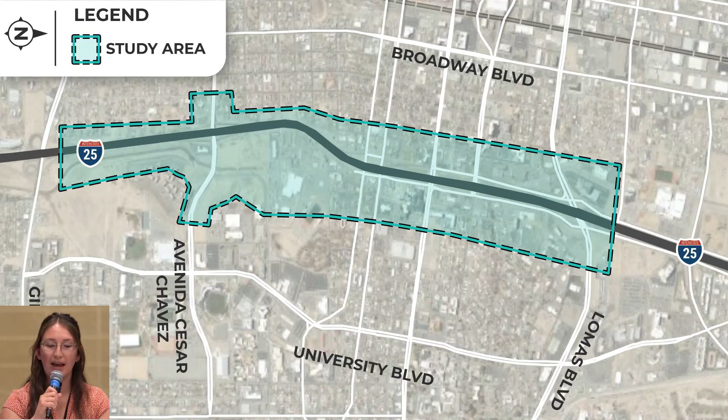So how did we get to this Phase 1B study? For those of you who remember, the DOT has looked at this area before. In 2014, Phase 1A of the I-25 South Corridor study was completed. This previous study defined a purpose and need for the broader corridor. Following that, the DOT completed Phase 1B, which identified a preferred alternative for the overall corridor. Regarding the specific S-curve, the previous preferred alternative was not drastically different than what is there today.

Since this previous study was completed in 2016, the S-curve has experienced reoccurring safety issues. This has prompted NMDOT to initiate the study and take a closer look at this specific section to identify a solution that improves safety and mobility. So that's how we got here. Conducting another Phase 1B study will look at the current conditions and gather new data.

At this time, all options are on the table, including the previously identified preferred alternative. It's great for you to get involved now and stay involved throughout the study. As part of this new Phase 1B study, we have drafted a new purpose and need specific to the S-curve, which we'll be talking through in a few minutes. At the end of Phase 1B, we will identify a preferred alternative. Following that selection, the study will move into Phase 1C, which includes detailed environmental evaluation and environmental documentation of the preferred alternative. Overall, we anticipate the study to last about 2 years between Phase 1B and 1C. We have a couple of boards in the room describing the NMDOT process in more detail if you want to learn more about what happens in these phases.

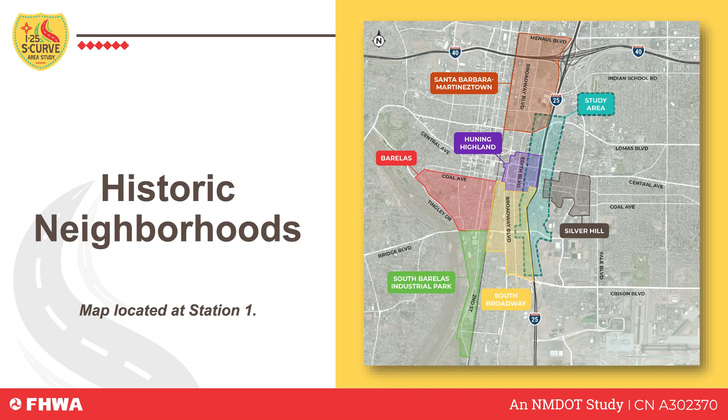We're also looking at environmental resources. So in this area in particular, there are aquatic resources, there are public parks, and there are historic properties. So we've gathered preliminary data to identify potentially historic buildings. And historic buildings are defined as buildings that are on or eligible for inclusion on the National Register of Historic Places, and they're generally at least 50 years old. And to be eligible for inclusion, a property needs to be considered significant in terms of its place or role in the patterns, trends, or events of our history. And like I've mentioned, we have maps depicting these resources at Station 1, so please take a look before you leave today. They'll also be available on our website.

Okay, purpose and need. So one of the early things we do as part of a study is to draft a purpose and need. And a purpose and need simply describes the reason for the improvements or the reasons for a future project. So we have a draft purpose statement on the screen, and it covers 4 categories we've identified as the need. So the NMDOT is proposing to improve safety, address future travel demand, and replace aging infrastructure on I-25 between milepost 223 and 225, and to accommodate active transportation across the I-25 corridor.

So why is this so important? Well, in order to identify a preferred alternative, the team will develop ideas and concepts and alternatives that will evaluate against the purpose and need. So if an alternative doesn't meet the purpose and need, if it doesn't address these transportation issues, then it doesn't move on for further evaluation. So it's important we get your feedback today on these transportation needs, as well as other needs that you may think be relevant. So in your surveys, you'll see questions around this.

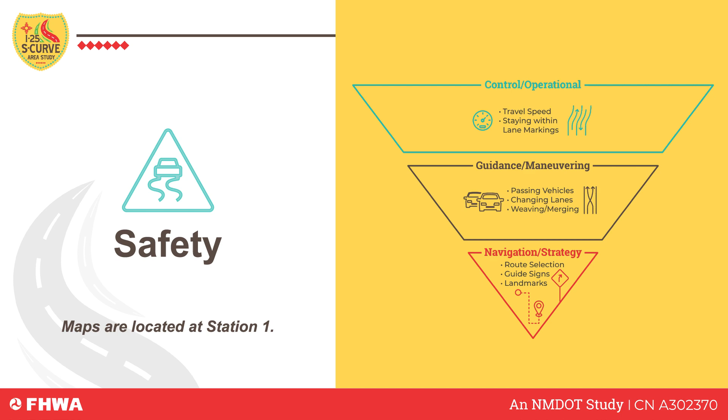At Station 1, we have crash data over the past 5 years that supports this need.

At Station 1, we have maps showing the existing traffic data and the future traffic data in 2050 if no improvements are made.

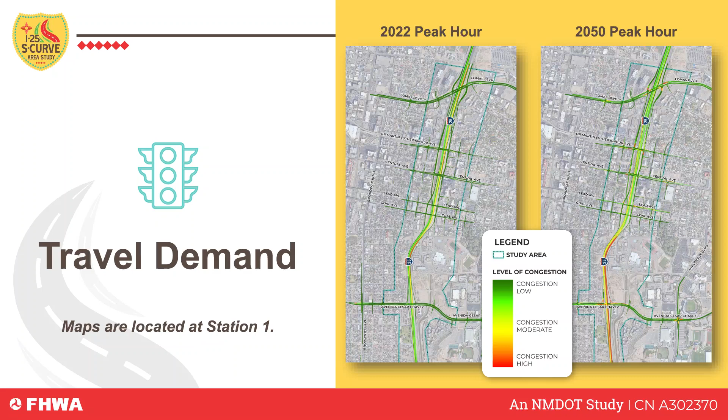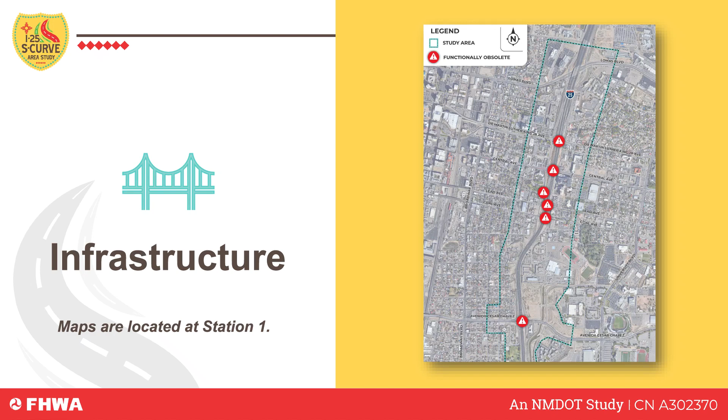Next, infrastructure. This is a broad term in transportation that includes bridges, pavement, barriers, drainage facilities, and more. Think about when you drive: is the drive bumpy? Are there potholes you try to avoid? When it rains, is there standing water in the roadway? There's a need to improve infrastructure that has reached the end of its service life. This section of I-25 was constructed in the 1960s, and although some improvements have been made since then, aging infrastructure is something we need to consider in this study.

Finally, active transportation. Part of what we consider are demographics in the study area, and the data shows that an average of 16% of households don't have access to a car, meaning they're walking, biking, taking buses, or finding other ways to get to work, to school, or to shop in their communities. This is something we need to consider as we work towards a solution.

There's a need to accommodate alternative modes of travel across I-25 in accordance with the Mid-Region Council of Governments Bikeway System Plan and Transit Network Plan. At Station 5, you can learn more about the ideas we're considering at this stage. In your survey packets, we have questions around these initial transportation needs and what you are currently experiencing as a driver or non-motorized user.

And with that, I'm going to hand it off to Mike to talk about our universe of ideas.

All right, thank you so much. Again, my name is Mike Worrell. Alonzo and I are going to be talking through what we've called the universe of ideas. At this point they are really just ideas—nothing has been defined or designed, and no conclusions have been reached. They're basically ideas, and the point is to solicit input and hear your opinions about them. I'm pretty sure there's at least one or two opinions in here. We want to hear all that.

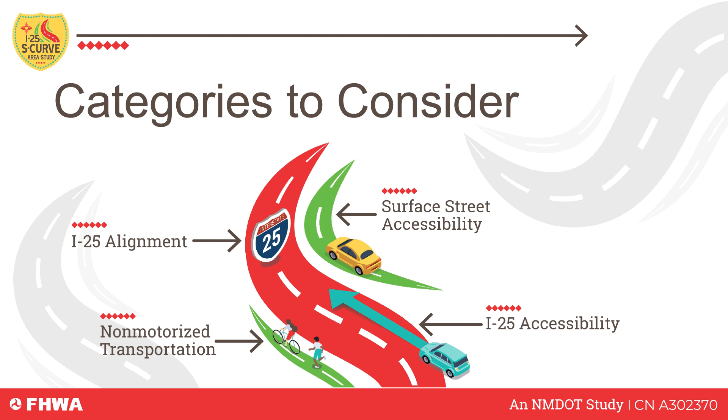Those different categories include what we call the alignment, the I-25 alignment. When we refer to the S-curve, we're talking about the alignment of I-25, the curves you experience, and there are ideas or options available to address and improve that situation. I also talked about non-motorized transportation—Alonzo has a number of different treatments.

At this point, this is really meant to solicit input and get your feedback. There's nothing formed with regard to that yet. We talked about surface street accessibility and accessibility on and off the freeway.

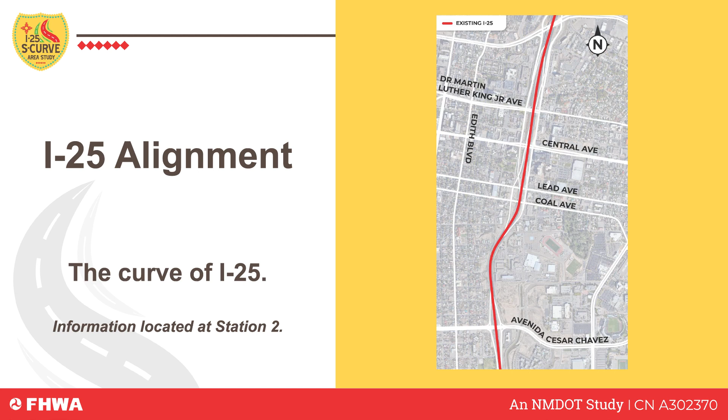Starting with the I-25 alignment, when we show these drawings, they're not meant to convey a design or any conclusions, just an idea to solicit your feedback. The freeway could be straightened by shifting part of the alignment to the west, or to the east, or something in the middle. These lines on the screen don't represent anything conclusive, just those ideas.

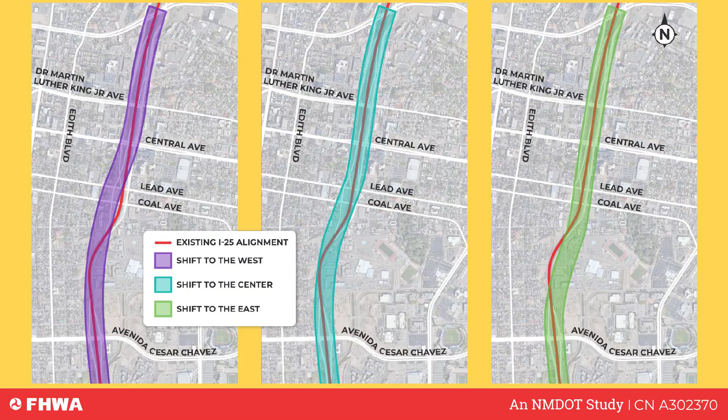Next, I'm going to describe a number of ways that people get on and off the freeway and how that functions, because in this particular area there's a big need for accessibility into the key parts of Albuquerque.

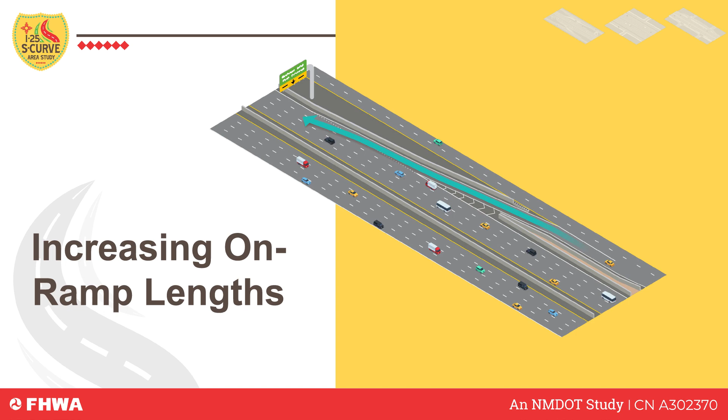Everybody's used to the classic interchange style with on and off ramps. The Sunport or Avenida Cesar Chavez interchange are classic diamond interchanges, very conventional, seen a lot around the country. Treatments we could consider include improving those ramps, lengthening them for better sight distance, acceleration, deceleration, and matching speeds. I think people are familiar with the concept, and if not, we can get into it more.

The concept of braided ramps - there are actually a couple of examples within the study area. For instance, going southbound and extending south of Central, you go over the top of the off-ramp to Lead. That's a braided ramp. Likewise, on the opposite side, if you're getting off to go to Lomas, you go over the top of the on-ramp from Martin Luther King - another braided ramp. So there are examples in a number of areas of town.

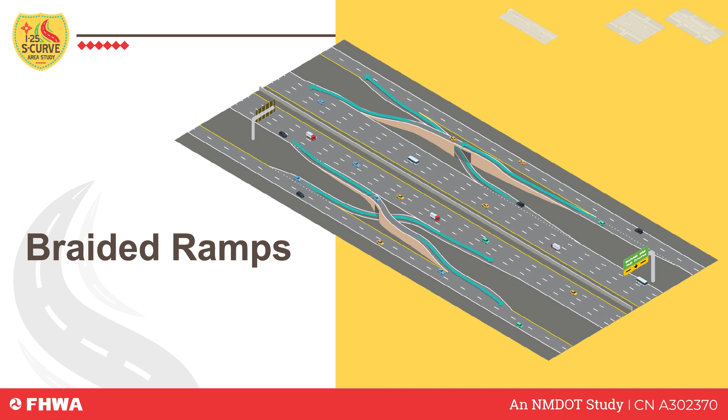That's another approach. And another thing everyone is probably familiar with is a system of one-way frontage roads. That system is used to provide accessibility in a more focused way from the freeway and provide local access through the city street network, with a number of different access points along it.

The last one, which I don't believe there's an example of in Albuquerque, though there are examples in El Paso, is called collector distributor roads. Those are similar to frontage roads, but higher speed, with no direct access to them. It's like a secondary form of road on the side where you have a higher speed exit from the freeway, operating at higher speed, with a system of exchanging ramps on and off to the local street network. I don't know whether any or all of these are appropriate, but they're ideas.

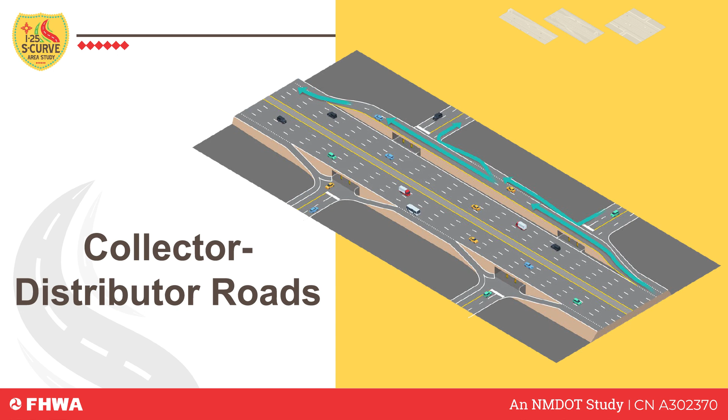As part of this universe of ideas we've been talking about this evening, surface street accessibility is one of the categories - think about how you enter or exit I-25. Surface streets within the study area are considered to be Avenida Cesar Chavez, Coal Avenue, Lead Avenue, Central Avenue, Dr. Martin Luther King Jr. Avenue, and Lomas Boulevard. To improve surface street accessibility, we plan to look at three different options.

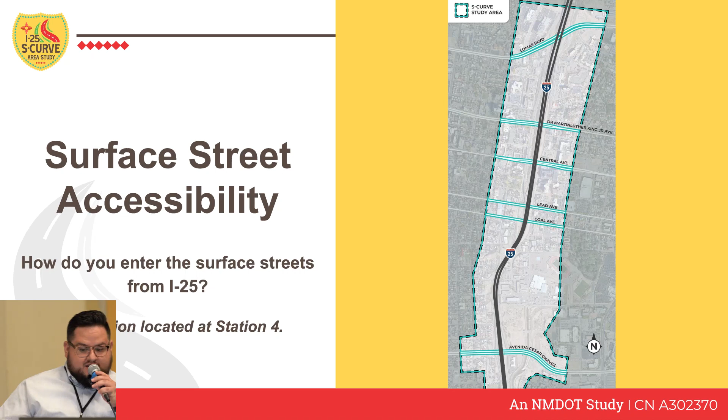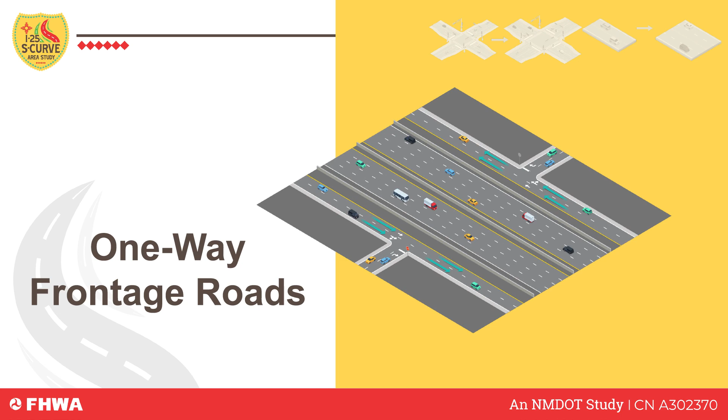Similar to what Mike discussed, we're going to be looking at one-way frontage roads. One-way frontage roads are a way to provide access to properties and surface streets while separating local accessing traffic from through traffic. This particular idea could help in two of our categories.

We will also be looking at increasing intersection capacity. We're not entirely sure what this will look like - we have an example here where this particular intersection had additional through lanes. The idea is to improve capacity at intersections through signal improvements, additional lanes, and auxiliary lanes, in efforts to reduce congestion and reduce crashes.

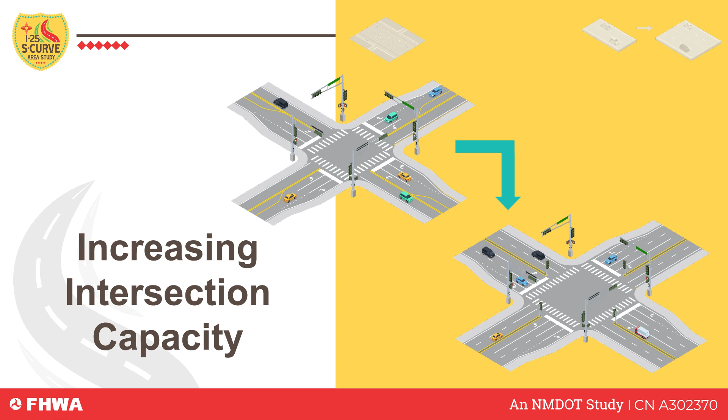Another idea we're going to be looking at for improving accessibility to surface streets is to increase the number of travel lanes. We're also not entirely sure what this will look like right now - it could be adding lanes in a single or multiple directions. More lanes will be able to accommodate more vehicles on the roadway.

So the last category that we have for the universe of ideas is non-motorized transportation. I just want to reiterate that these are in no particular order of importance. We believe all 4 categories in the universe of ideas have the same equal importance.

So what is non-motorized transportation? It's any mode of transportation that doesn't include a motorized vehicle. This could mean walking, cycling. It'll vary by individual. As population grows, we really need to look at how individuals are getting to and from their destination. Like Nicole mentioned earlier, within the study area, about 60% of the population don't have access to motor transportation. So non-motorized transportation has to be part of our solution.

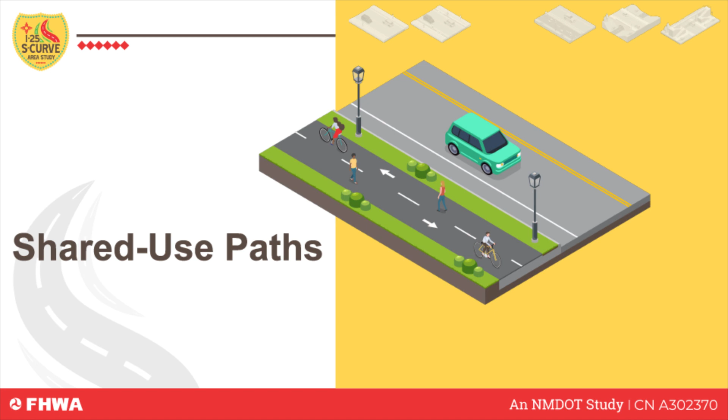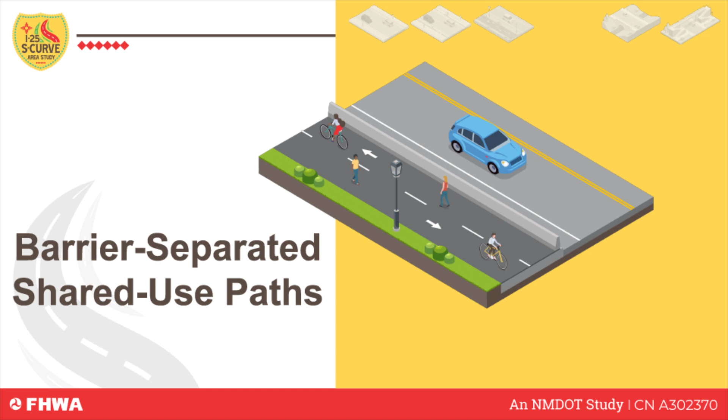This is something that's becoming more common, typically a concreted or paved area, wide enough to allow travel in both directions. They typically have pavement markings as well. We're going to take this option a step further and look at the feasibility of providing additional safety for the non-motorized user by introducing a separated barrier.

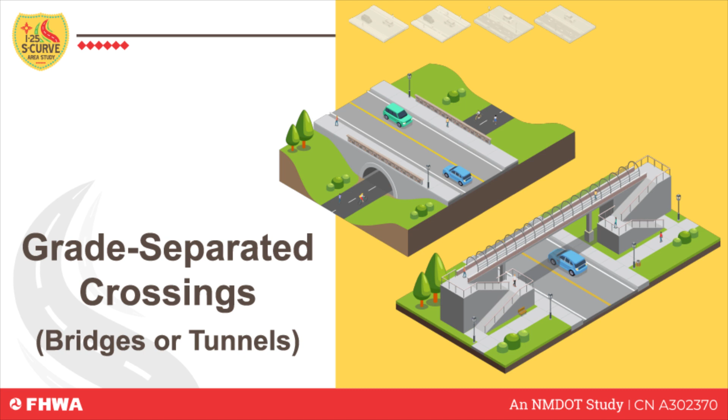And the last idea we're going to be looking at for improving transportation for the non-motorized user will be a grade separated crossing. We don't know what this will look like. It could be a form of a tunnel or an overpass bridge. We'll be looking at this closer.

So this concludes what we're calling our universe of ideas. If you haven't already, there should be survey packets around. In that survey packet, each one of these categories are listed, and we are asking for feedback on each and every one of them. So any feedback would be greatly appreciated.

As you've all seen in the other room, we have stations also for each of these categories of the universe of ideas. I think we're going to move forward here with the Q&A, and we'll stick around if there's any additional questions that you can come talk to us at those individual stations. And with that, I'll hand it over to Francine.

Thank you everybody, that was a lot of information. So before we get started with our Q&A, I do want to provide some information about our public comments and how to stay involved after today.

So as you've seen, today kicks off our formal comment period, which will be open through December 17th. So the question is, how do you submit a formal comment? We want to make sure that we capture all of the input, all of the community's feedback, all of the stakeholders' feedback. So you can submit a formal comment today in person, in multiple ways, via a comment form, a survey packet, or via the Q&A session we're getting ready to host.